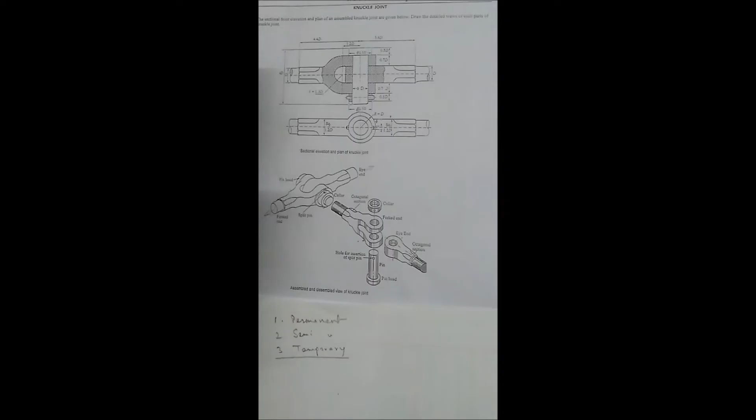Now start knuckle joint. Knuckle joint is a temporary joint. There are three types of joint used: one is permanent, second is semi-permanent, and third one is temporary joint. Knuckle joint is an example of temporary joint because we can easily assemble and disassemble all the parts of knuckle joint.

And see, these are the parts of knuckle joint. This is the assembled view and this is disassembled view. First part is pin, second part is eye end, third one is fork end, next collar, and there is another part that is split pin, or sometimes a taper pin is used. Okay, knuckle joint carries tensile load. Tensile load means the load is given in opposite directions.

And how is it assembled? See, eye end and fork end, both the parts have holes. Eye end has a single hole and fork end has two holes. Collar also has a hole. All these holes are the same diameter. Now if you insert this eye end into the fork end, this hole and these two holes will be in the same line.

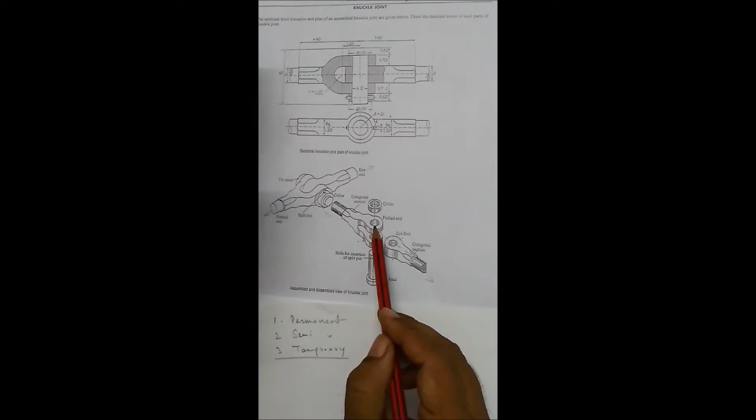Then you enter the pin through this hole from below, and some part of this pin will come out through this hole. Then you enter this collar onto the pin, and see, there is a small hole, and if you enter a split pin through this hole, then this assembled part will be ready.

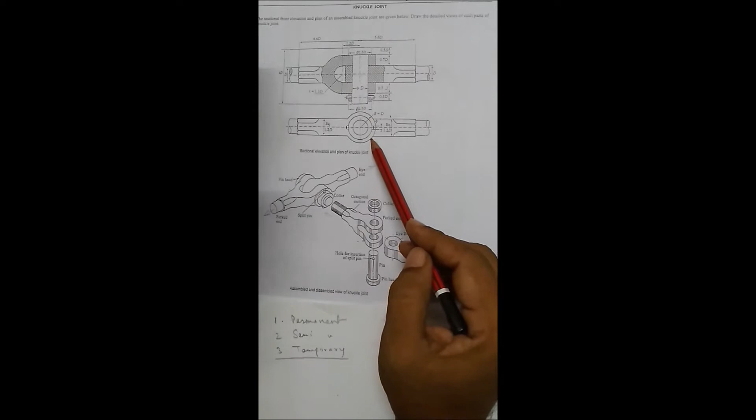And if you section this knuckle joint, then you will get this sectional front view and top view of this assembled part. Today we will have to draw the front view and top view of each part of the knuckle joint. This is the assembled view. We have to draw the disassembled view of this part.

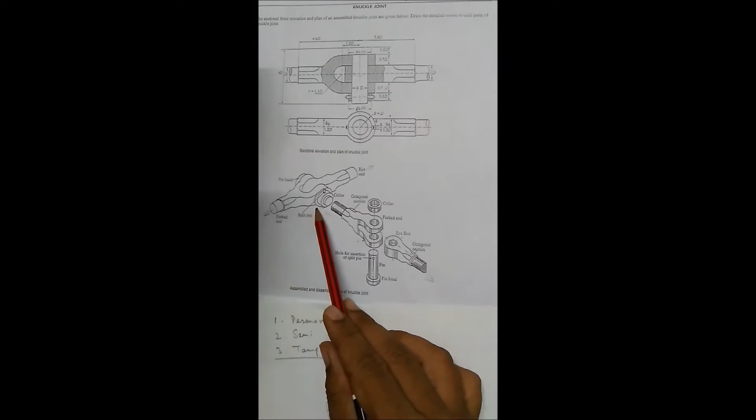First, see, this is the pin. We have to draw front view and top view of this pin. Similarly, we have to draw front view and top view of eye end, then fork end, then collar, and then split pin. Okay. And knuckle joint is used in roof truss, bicycle chain, and some other fields.

And see, there is an important part. This part of the fork end and eye end, for both, is octagonal shape. First part is circular, then this part is octagonal shape, and then this part is square shape. So we have to be careful when we draw this part.

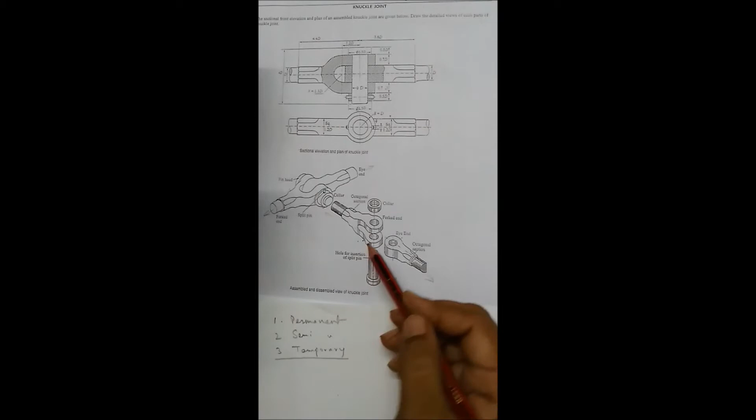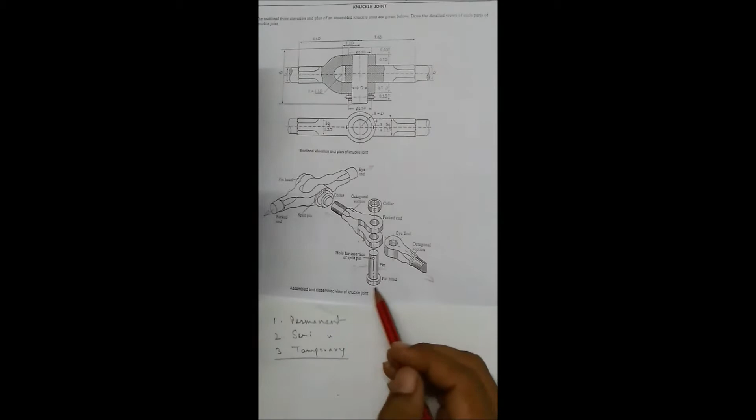See, there is a dimension given, D. This is the diameter of the pin. This diameter is given D. You have to take the dimension D as any value. You can take 20, 30, 40, any value. And with this value of D, you have to calculate all these values: 0.5D, 0.7D, 3.6D. Then you have to draw. Okay, let's start.

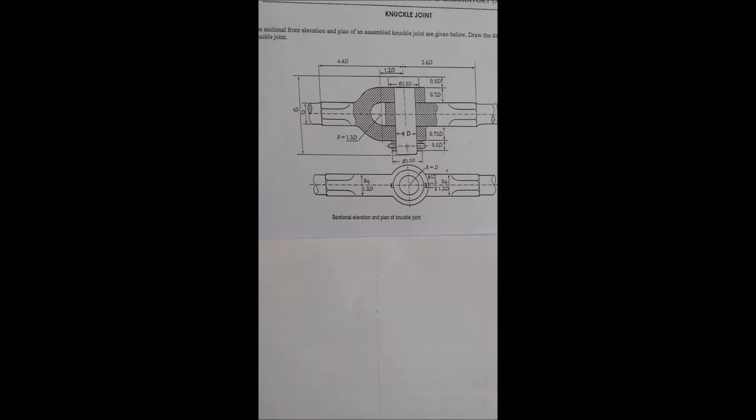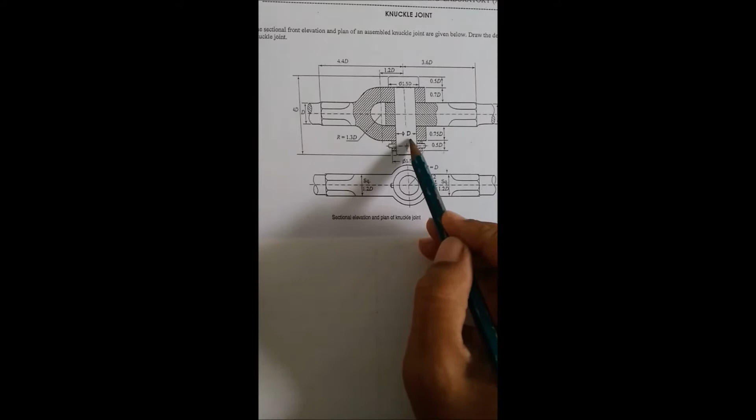Now you have to start the pin, or knuckle pin. This is the pin; this is called the head, and this is the body. Diameter of the body is given D, and you have to take any value for D. Here I have taken D equal to 30 mm. With the help of D equal to 30 mm, you have to calculate all the dimensions of this drawing, and then you have to draw.

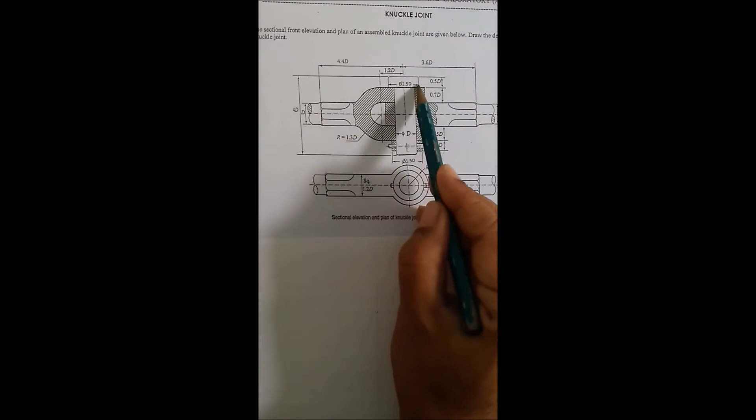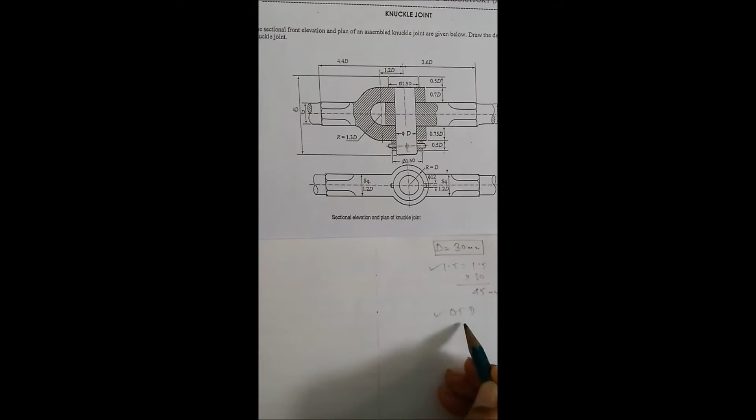So first start the pin. Here the diameter of the pin head is 1.5d and height is 0.5d. So 1.5d means 1.5 into 30 is equal to 45 mm, and height is given 0.5d, it means 0.5 into 30 is equal to 15 mm.

So first you draw a horizontal line, and this length is 45. It means this is 22.5 and here 22.5, both sides of the center line. Now draw a vertical line. This height is 15 mm, and join this line. This is the head of the pin. Now this is the midpoint. I have to take 15 mm this side and 15 mm the other side. So through this point you draw a vertical line.

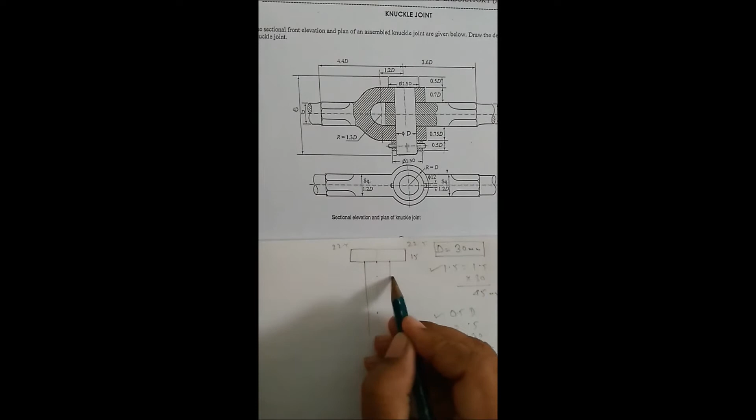So diameter is 15 plus 15 equals 30, and see, the height is 4d. It means 4 into 30 equals 120. So from this point you have to take this dimension 120. Okay, and this height is 15.

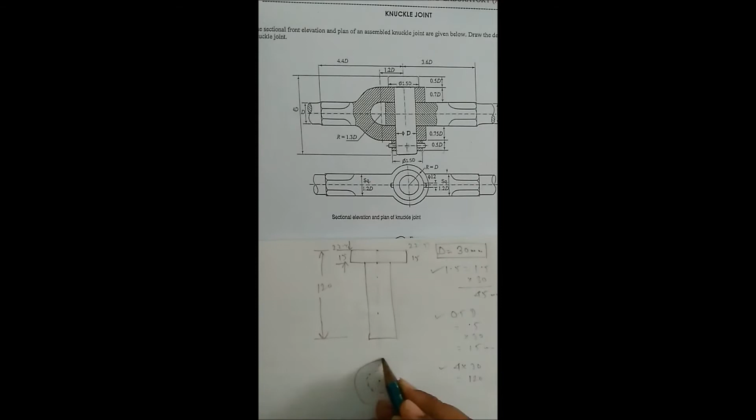Now you take a center point and with 15 mm radius you draw a circle, and this will be a dashed line, because from the top this circle will not be visible. Then taking 22.5 radius and the same center point, draw another circle. This diameter is 45, and the inner circle diameter is 30.

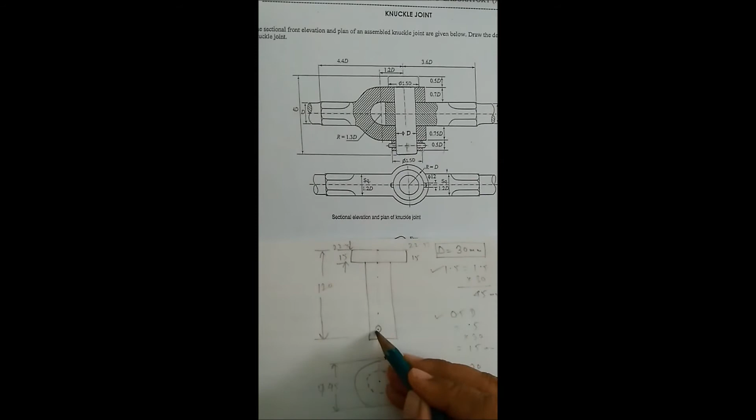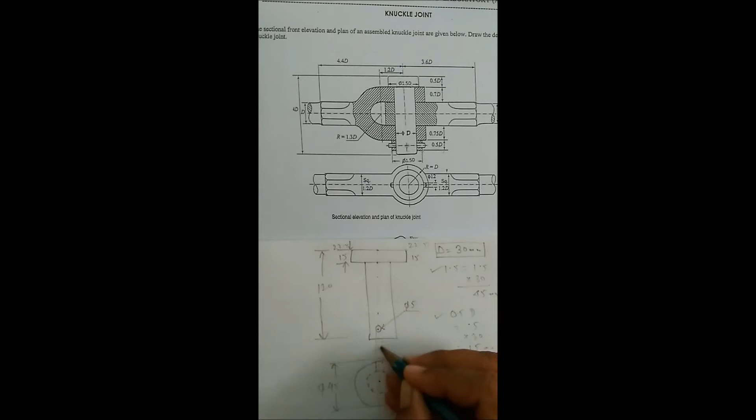Now you have to locate a hole. Here is a hole, the pin hole. I have taken 5 mm diameter for this hole. You can draw this hole with a circle master or freehand. Now we project this hole and get a dashed line inside the circle. And this is the front view and this is the top view of the pin.

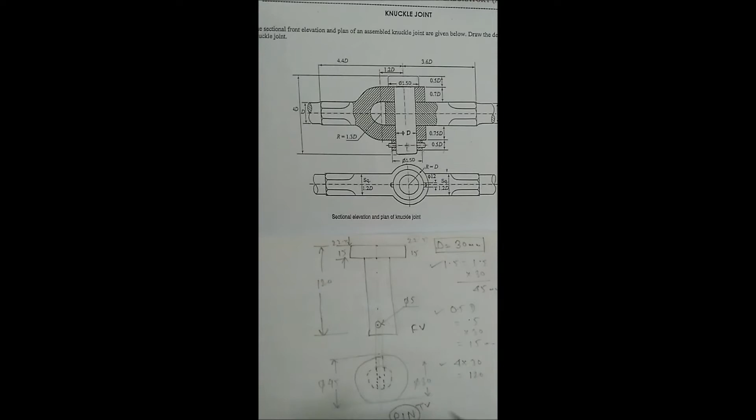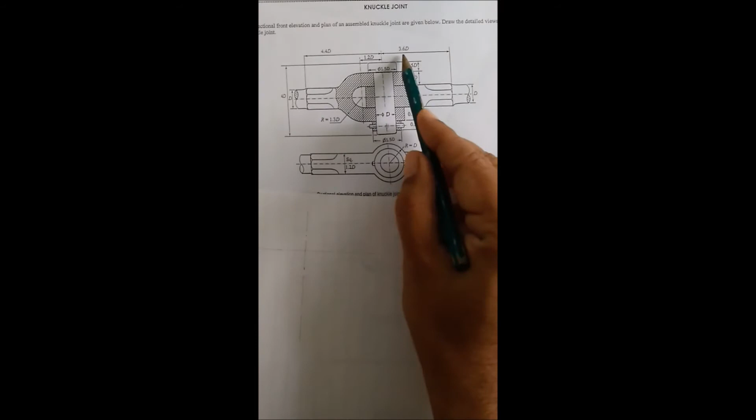Now start the eye end. This is the eye end, this is the front view, and this is the top view of eye end. See the dimension. This diameter is D. Here I have taken 30 mm, and the total length, you see, this is 3.6d from this point to this center point. This is 3.6d, and this distance is d by 2.

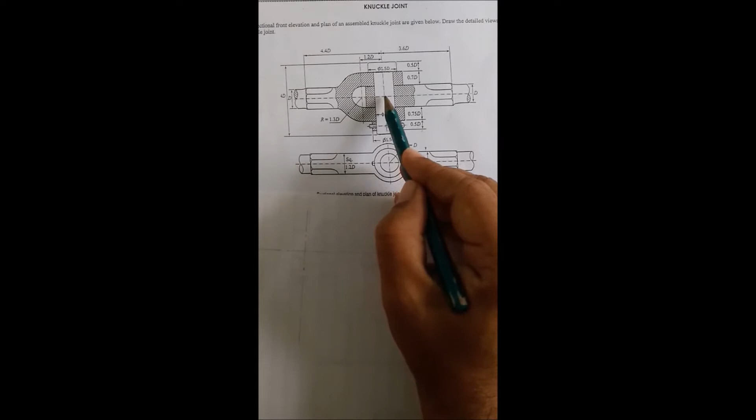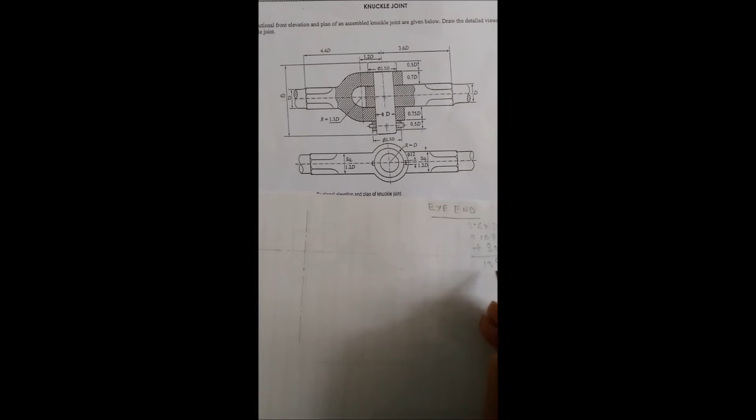Total distance is d, and the half distance is d by 2, and this half is also d by 2. So from this point to this point, d by 2 plus d by 2 is equal to d. D means 30. So this is 30, and then this point to this point is 3.6d. 3.6d means 3.6 into 30 is equal to 108 mm. So from this distance to this distance 108, and then this distance is 30. So you add 30, then it will be 138. So total distance is 138 mm.

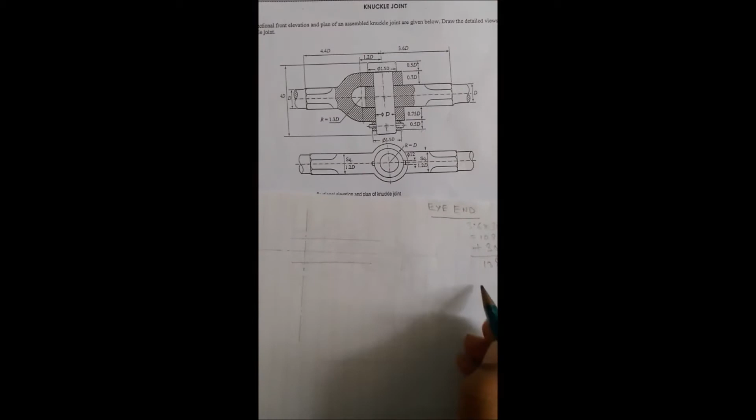So first draw this center line. See, there is a vertical center line, this is a horizontal center line. I have drawn these two lines. Now you draw horizontal line. This distance is given 1.2d. It means 1.2 into 30 is equal to 36. So you take 18 mm upper side and 18 mm lower side. So total distance is 36.

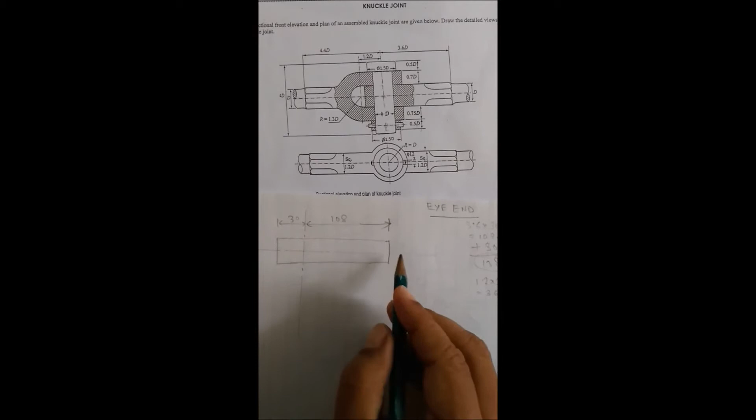Now you take this distance 138. So this is 30 and this I have taken 108. So total distance is 138. I have taken this. Now you see this distance is 15. So taking 15 mm, I have drawn a vertical line. Then this is 15 and again 15. So total distance is 30. So from this point you take another line. So this distance is 30 mm. And this point to this point is 15 mm.

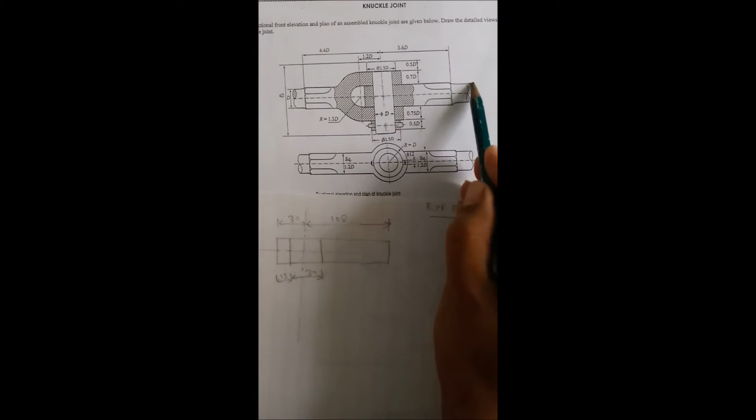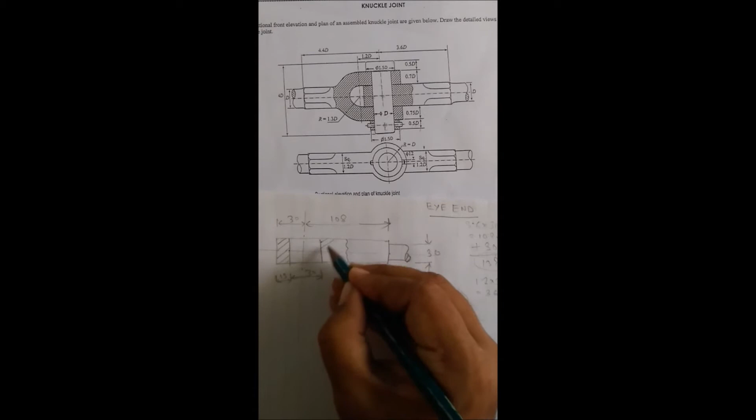Okay. Now you see there is another two horizontal lines. This distance is D. D means 30. So this is 36. So you take the midpoint and draw these two lines. This is arbitrary distance and you draw this line with free hand. Okay. And this is 30. Now you have to draw the hatch line. Here you see there is a hatch line and there is a freehand line. You draw this freehand line any distance from this point, and draw this 45-degree hatch line with 2 mm gap. Okay, so this is the front view.

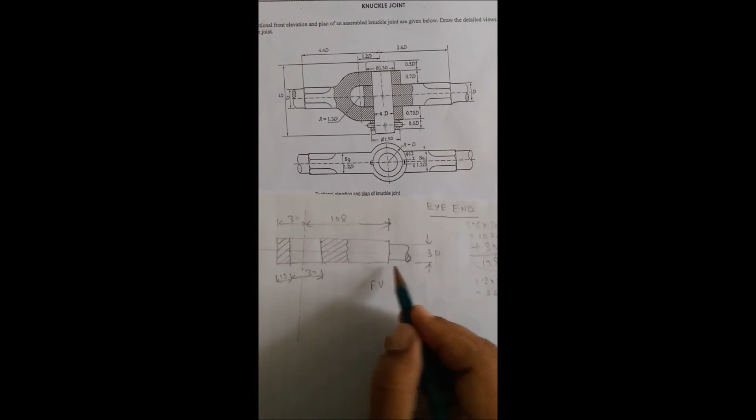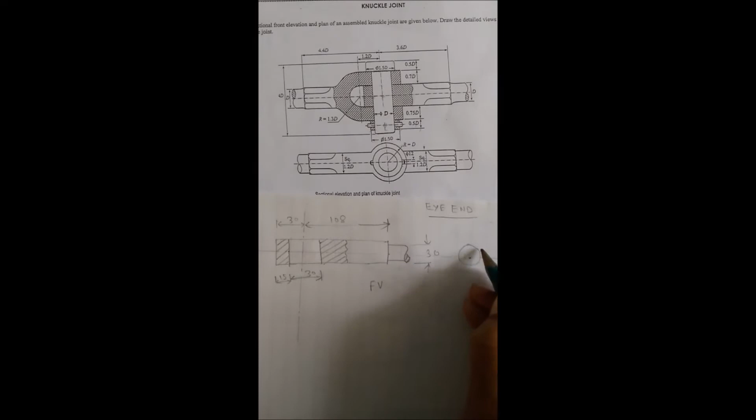Now I have to draw this line. So for this line we have to draw the side view. I will draw side view. First it is this calculation part. Now we extend the center line and taking any point on this line, you just draw a circle. Diameter is 30. And again you draw another circle. This diameter is 36 and the inside diameter is 30. Now tangentially you just draw horizontal line and vertical line of this circle. This vertical line will touch this circle and horizontal line also touch this circle.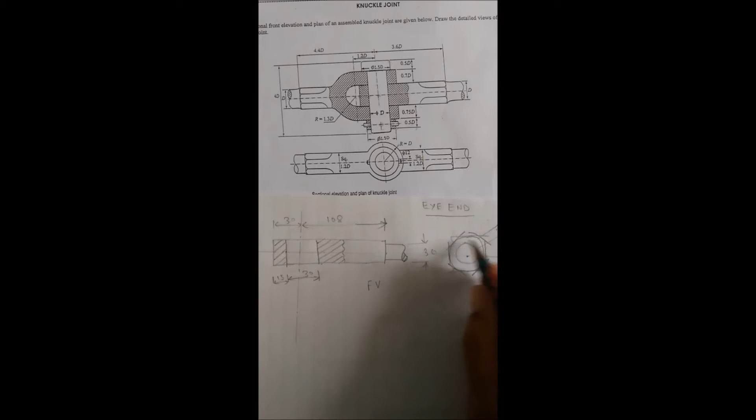Now draw 45-degree line with the help of set square and we will get an octagon shape. Okay, 8 sides. All these lines are 45 degree. This line and this line 45 degree. Okay, you will get this side view. Now you hatch this part and you project this point and this point, these two vertical lines, you project these two corners and draw the horizontal line and you will get this line.

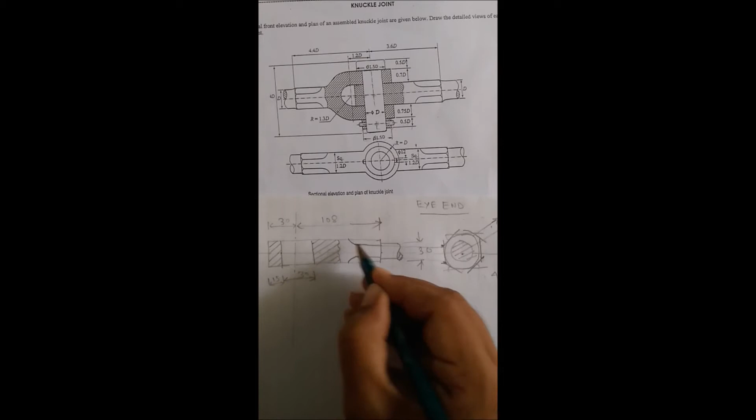This distance is 1.2 D. I have drawn these two lines, this gap I have taken. Now you draw with French curve or freehand and this distance is 1.2 D. It means 1.2 into 30 is equal to 36. So this distance is 36. This is the front view of eye end.

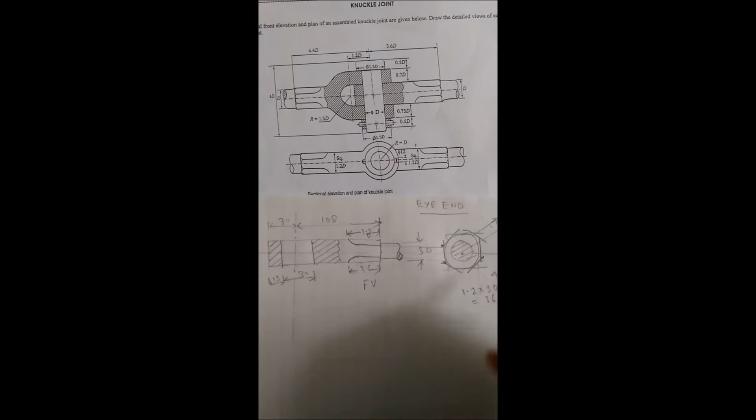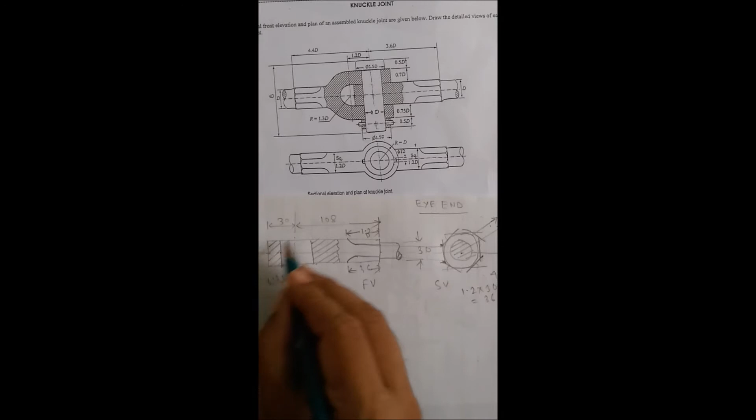Now you have to draw the top view. This is front view and this is side view. Okay, now you have to draw top view taking any center point and this radius, it means 15 radius. This total is 30, so half radius is 15. So 15 radius, you draw a circle. Again taking this radius, it means 30 radius, you draw another circle.

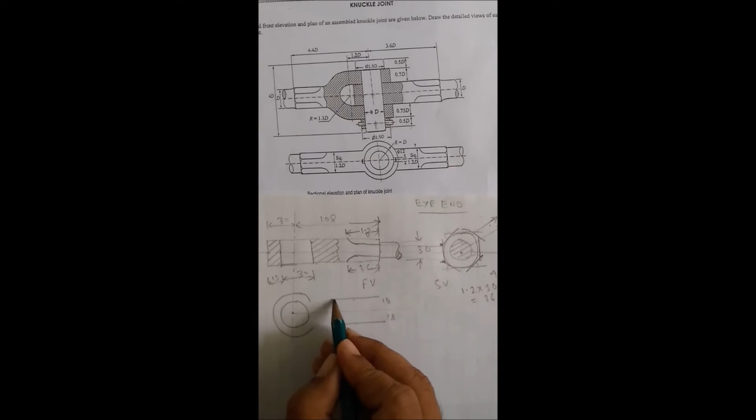Okay, now you draw this line and from this line you draw this horizontal line. This gap is 18 and 18. Same way this is 18 and 18. It means this gap is 36. Similarly, this gap will be also 36. Now you extend this line and join this line. Okay, now project this line and draw vertical line, draw horizontal line. This gap is 30, same, and you draw this type of line.

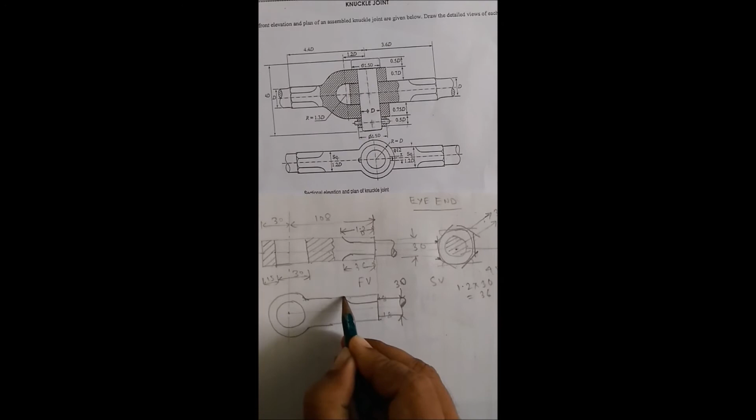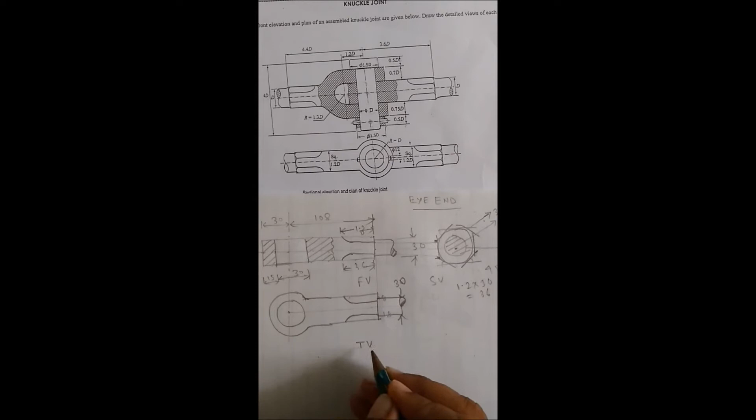Similarly, you have to draw on this figure. You can take this dimension in divider and mark these 2 points and then draw this horizontal line, and this line you can draw with the help of freehand or French curve. So this is the top view of eye end. Okay.

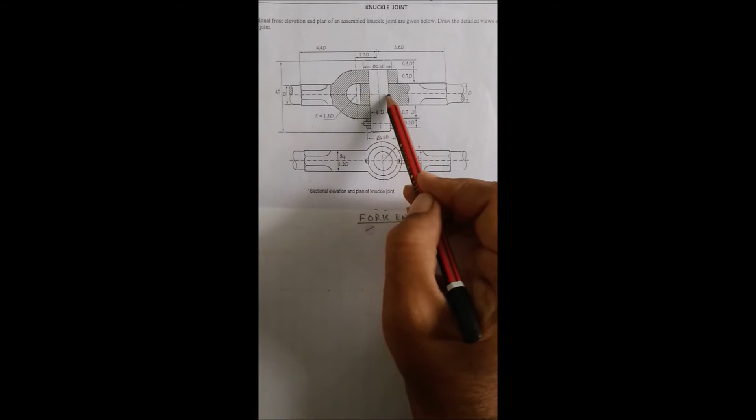The next part is fork end. This is the fork end. This is the sectional front view, and this is the top view. You have to draw the front view and top view in the page. First see the dimension. This is 4.4D from this point to this point, and then total distance is D, so half distance is D by 2, so 4.4D plus D by 2. Then this part is also D by 2, so D by 2 plus D by 2 is equal to total D, then 4.4D. So 5.4D is the total distance from this point up to this.

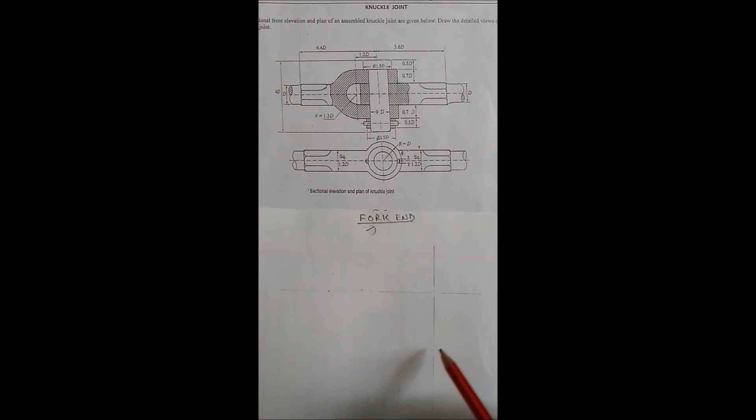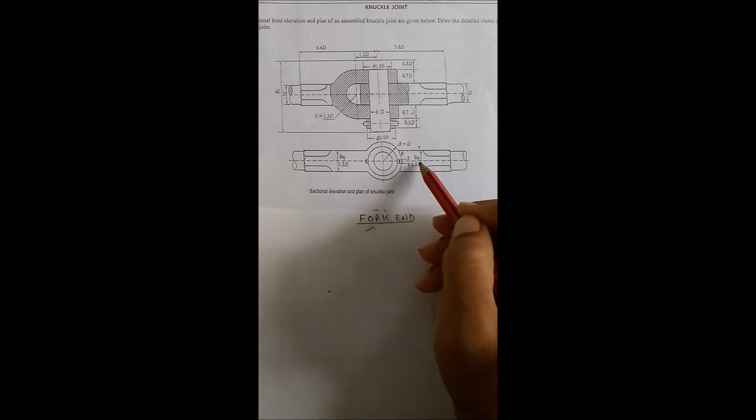So first you draw this vertical line and horizontal line, this center line, I have drawn. Now you take any point, and this is the center of this arc. This gap is given 1.2D, it means 36. So total distance is 36, so we have to take the radius half, it means 18. Taking any center point and 18 radius, you draw this arc.

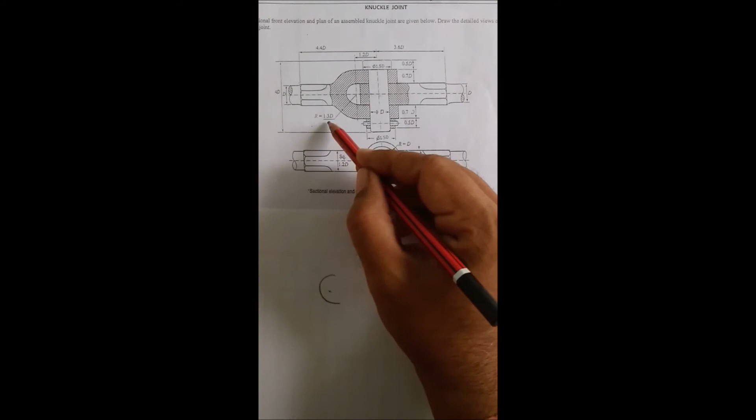Now there is another radius 1.3D, this is outer circle, outer radius is 1.3D, it means this is 39 radius. Same center point and 39 radius, you draw this arc. Okay, now after that you have to draw the horizontal line, so you draw this horizontal line.

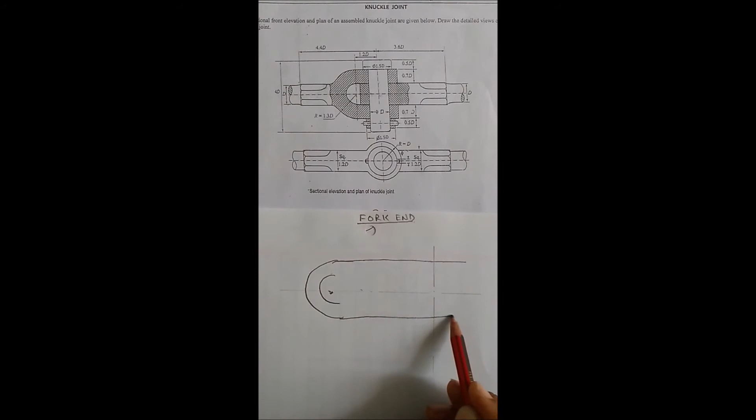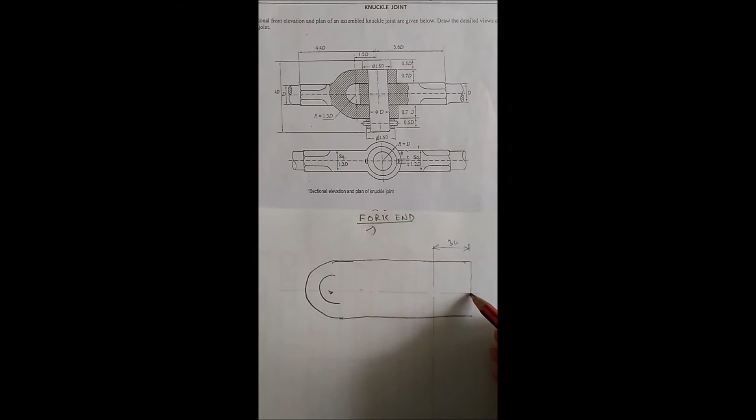Okay, and from this point to this point this is D, it means 30, so you take 30 mm, this is 30, and draw a line, vertical line. Okay, now extend this line also. Okay, and erase the middle portion.

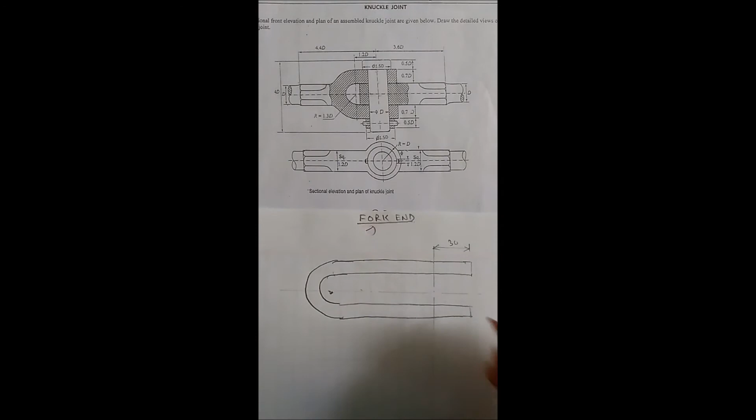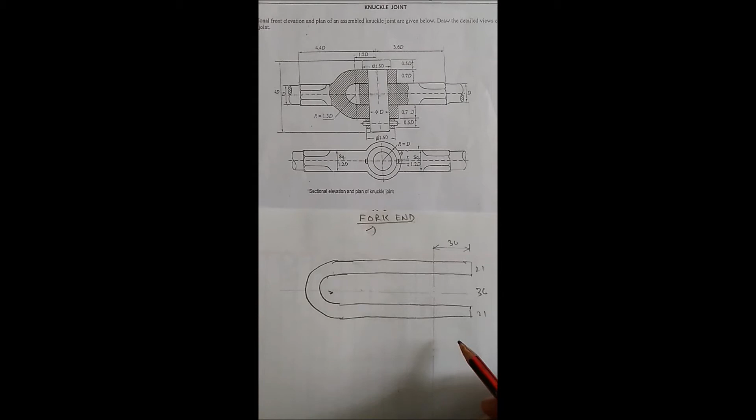Now this gap is 0.7D, it means 21, and this lower part is also 21, this is 21 and 21, and this one is 36, 18 radius, it means 36. Okay, now you extend this line on the left side. I have drawn these two lines.

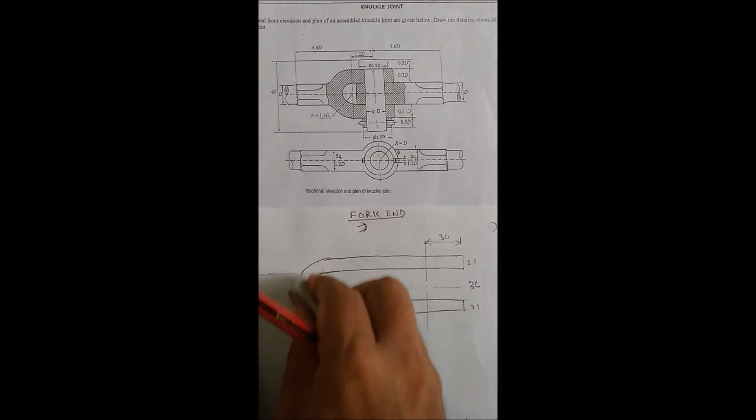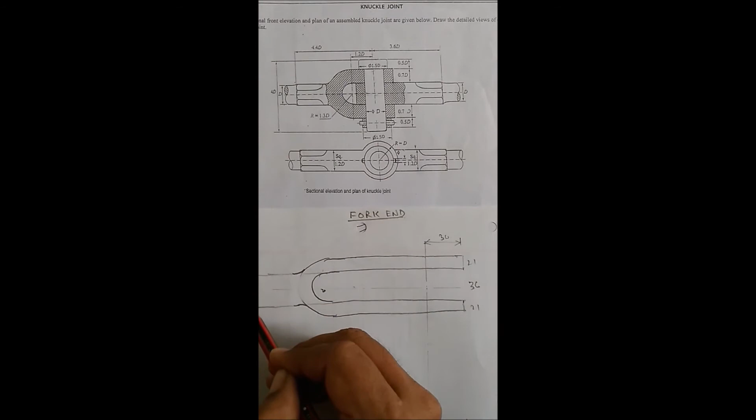Okay, now I have to erase this part, middle portion I have deleted, and after that you just with the free hand carve this portion, and then you have to take 4.4D from this center line. So from this center line you take this distance 4.4D. It means 132, this distance. Okay, now you take the midpoint and

draw this horizontal line, this portion. This is D. It means this is 15, this is 15. Its total is 30. And then with the help of French curve or freehand, draw this line.

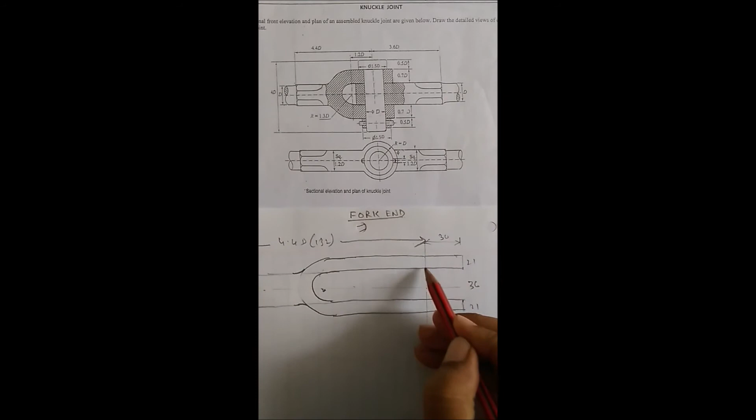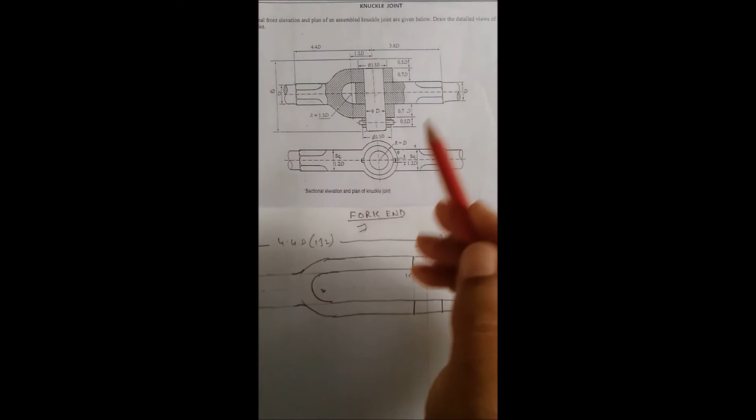Okay, now see, there is a pin, diameter is D, means 30. So on both sides of this center line you take 15 and 15. This is 15, this is 15, and draw a vertical line. Okay, now you have to draw this line as I have drawn in the previous part, eye end, from the side view. This is 36. You have to project this line from the side view.

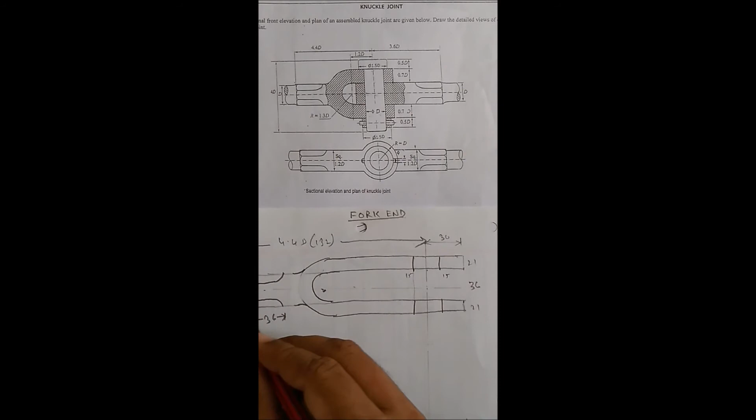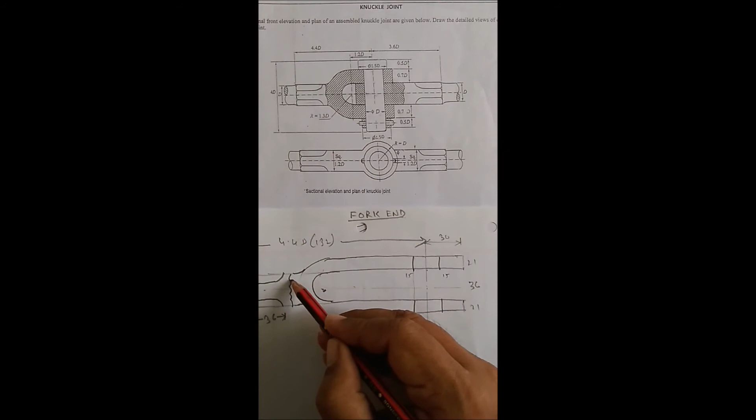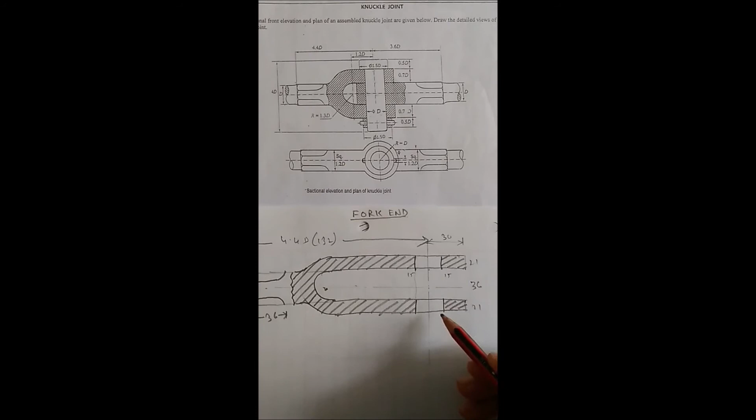Now there is a break line at any point. You take any point and draw this break line, this freehand line, and then you have to hatch this portion, 45-degree lines with the help of a set square and 2 mm gap. This gap should be equal. Okay, this is the front view of the fork end. See, I have drawn this part, fork end. All the dimensions are given.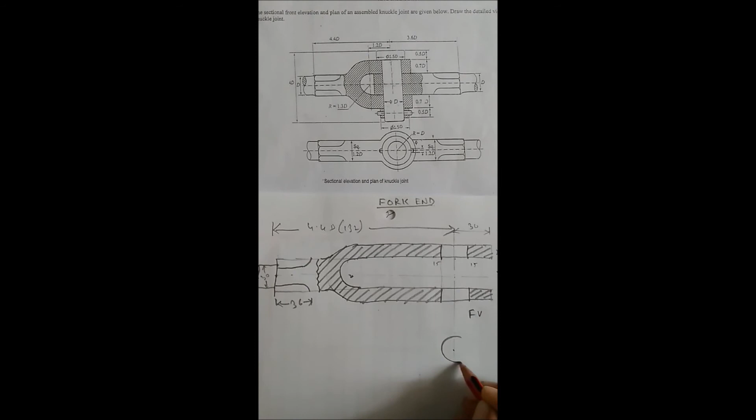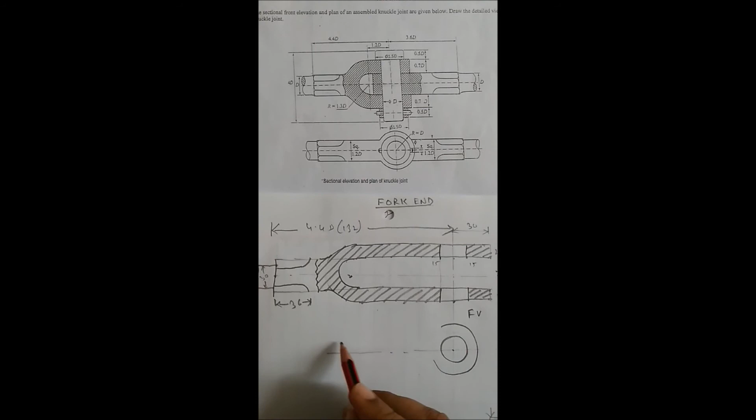Now I have to draw the top view of the fork end. So you take any point, center point, and taking 15 mm radius, this portion, you draw a circle. Finally, taking this radius, it means 30, and the same center point, you draw another circle. Now this is the center line, and on both sides of the center line you draw two horizontal lines. Distance is 18 and 18. In total it is 36. And you extend this line.

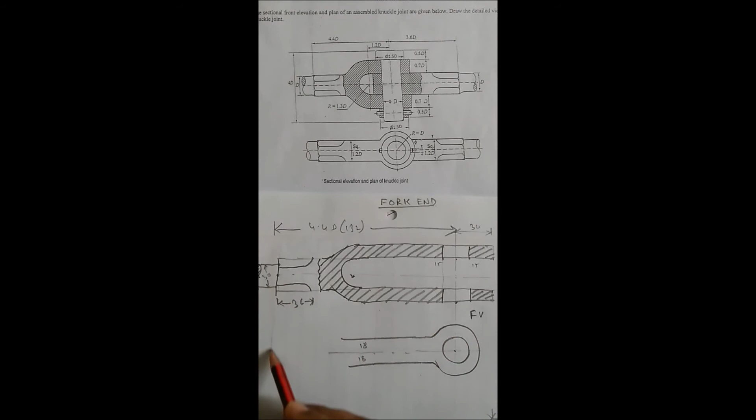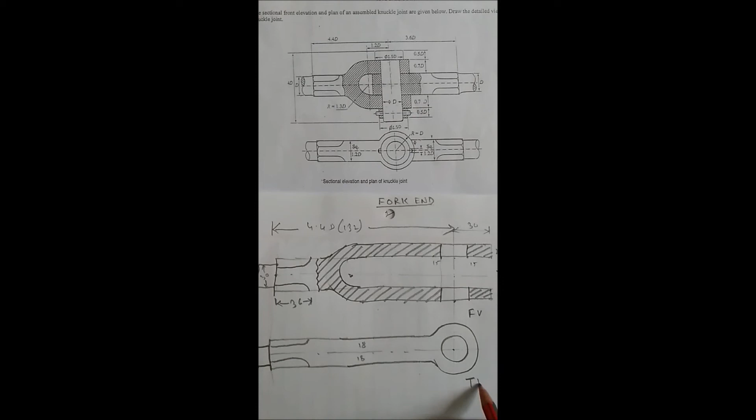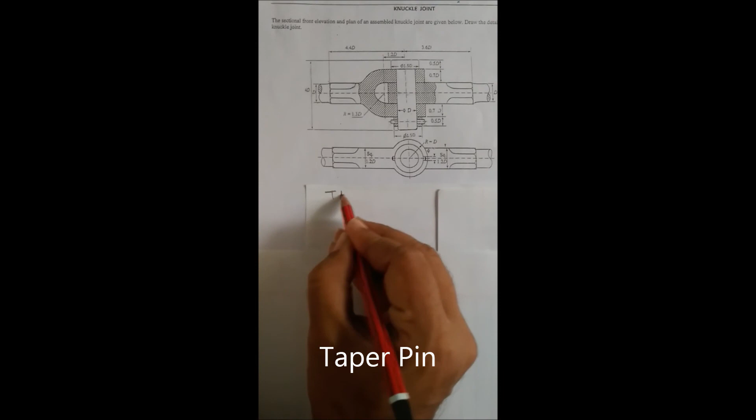Now you have to draw the last part, taper pin. This is the taper pin. The length of the collar is 1.5D and the taper pin length is more than 1.5D. You take 1.8D. 1.8D is equal to 1.8 into 30 is equal to 54. So first you draw a line. This length is 54.

Then draw a vertical line of 5 and draw an inclined line, and you take this length 4 mm. Here you take vertical line 5 mm and here you take 4 mm. That's why it will be a taper pin. And you project this part in the side view, you will get two circles. This is the side view and this is the front view of the taper pin.

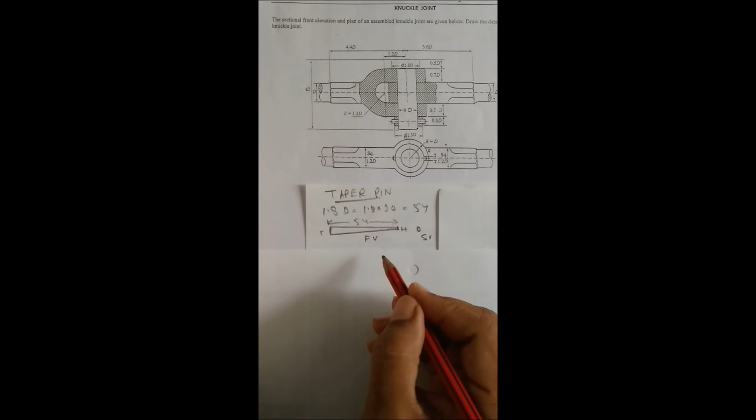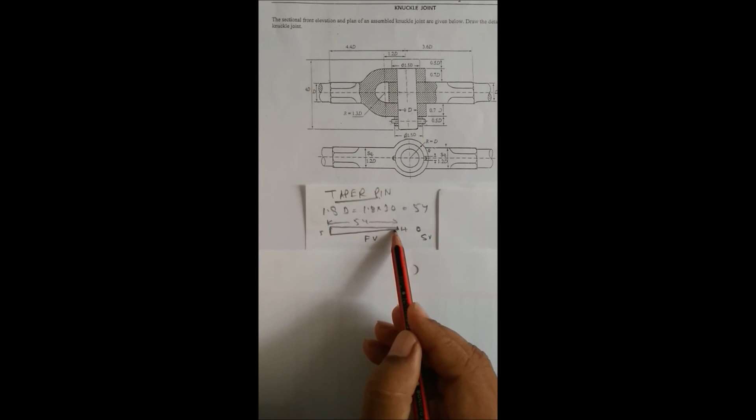This is inserted through this pinhole, and after pressing, it enters through the pin and collar, and this is the taper pin. No need to hatch this part, and if you take 5 mm and here 4 mm, that's why it will be a taper pin. Both these lines are not parallel. Okay.

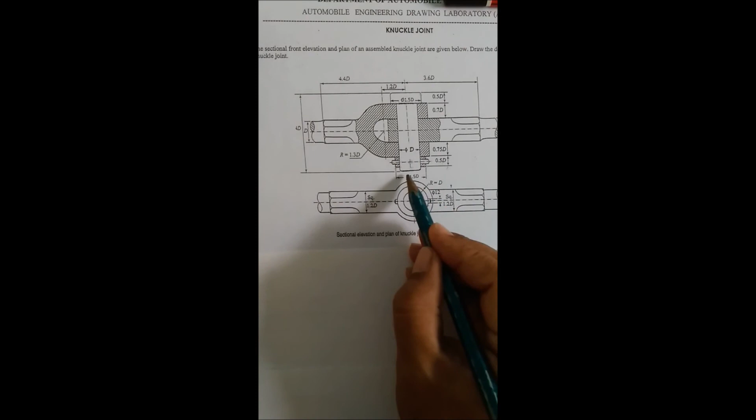Now you have to draw the collar. This is the collar. You have to draw the front view and top view of this collar. Dimension is given 1.5D from this point to this point, and height is 0.5D. So first you draw a center line and taking any center, draw a circle. This diameter is 30.

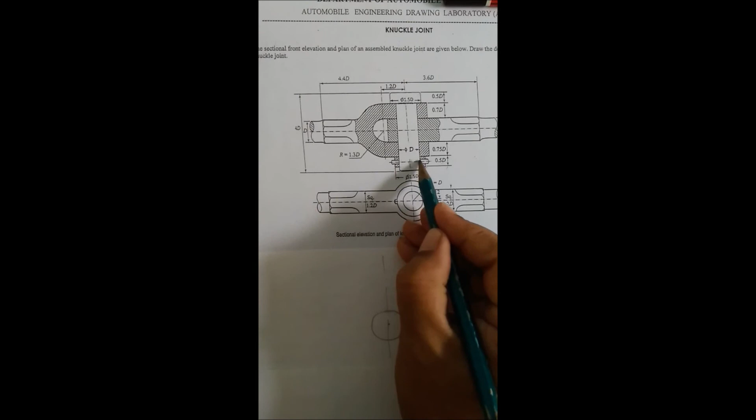This point to this point is the diameter. Pin diameter and collar diameter are the same. So pin diameter is D, 30, collar diameter is 30. So I have drawn this circle. Now draw another circle. This diameter is 1.5D. It means 45. 1.5D. Now you have to draw the front view.

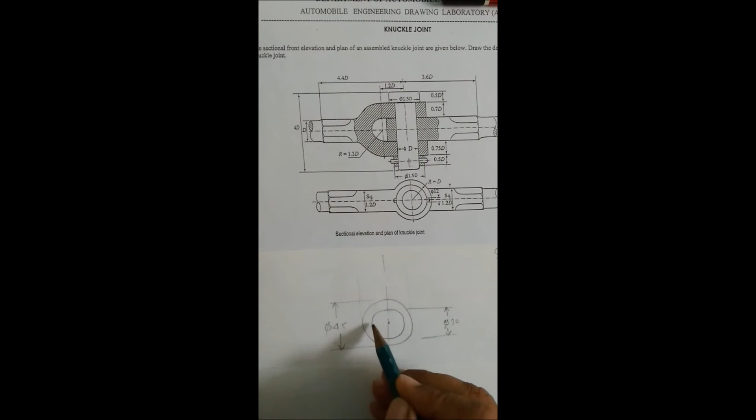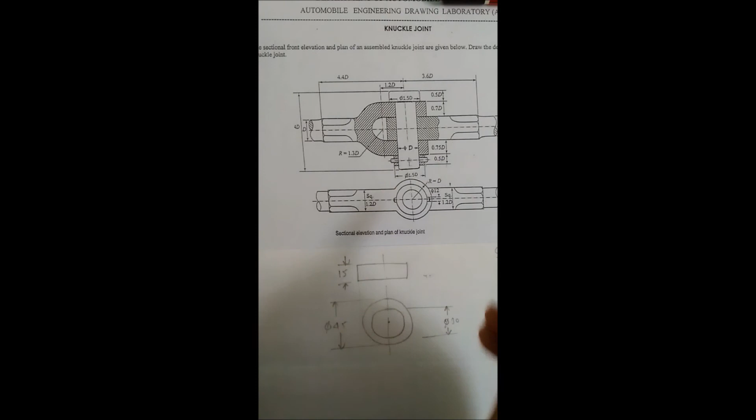Now project the bigger circle and smaller circle, and taking any gap you draw a horizontal line. This length is 45. Now you draw a vertical line. Height is given 0.5D. It means 15. 0.5 into 30 is 15. I have drawn this. Now project the inner circle and draw the dash line.

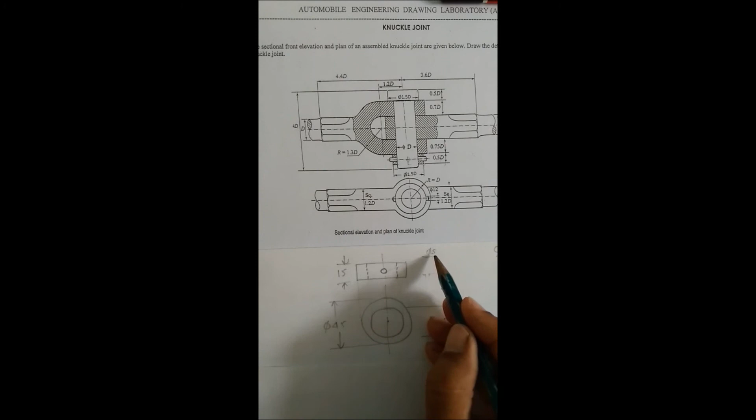Now draw a hole on the collar. This diameter, I have taken 5 mm dia. You can draw it freehand or with a circle master. Now you project this hole and you will get a dash line on the collar. This is the front view and this is the top view of the collar.